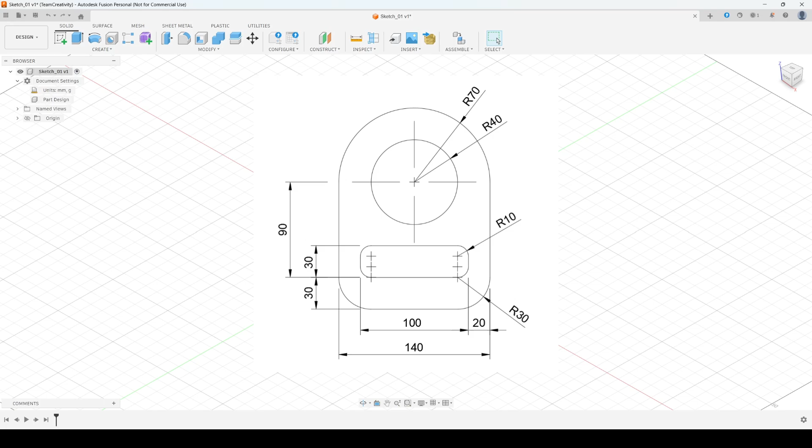Alright, let's get started. I'll press the S key and choose Sketch, then select the front view. Press S key again and choose Center Rectangle.

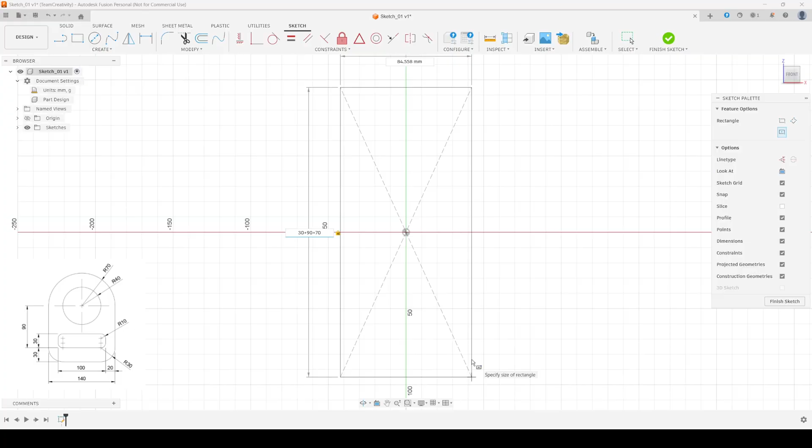Here, we don't need to calculate anything manually, we can simply type the values. I'll enter 30 plus 90 plus 70, then click Tab and type 140. After that, press Enter. Now we can see the rectangle turns black, which means it's fully constrained and can't be moved manually. That's exactly what we want.

Next, let's draw the second rectangle. We'll add the dimensions: the height is 30 and the width is 100.

Okay, now we need to constrain this rectangle. We also need to define the distance from the main rectangle, so 20 millimeters from the outer edges and 30 millimeters from the bottom edge.

Now that the inner rectangle is fully constrained, we can move on to creating the top rounded shape. One way to draw the R70 arc would be using a circle, but I'll show you a simple method using Fillet.

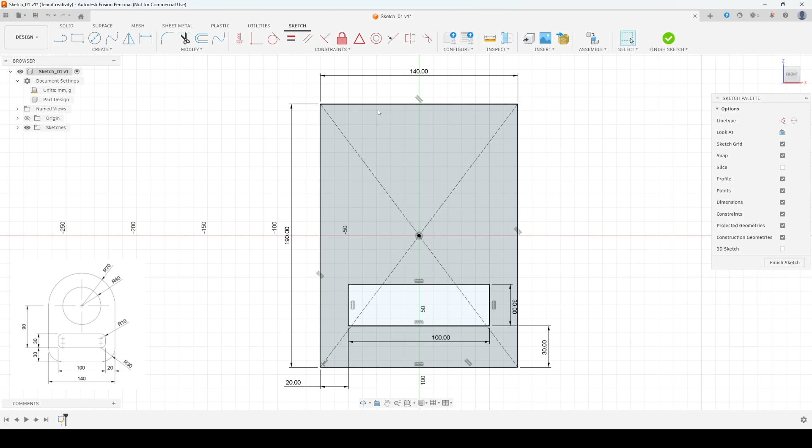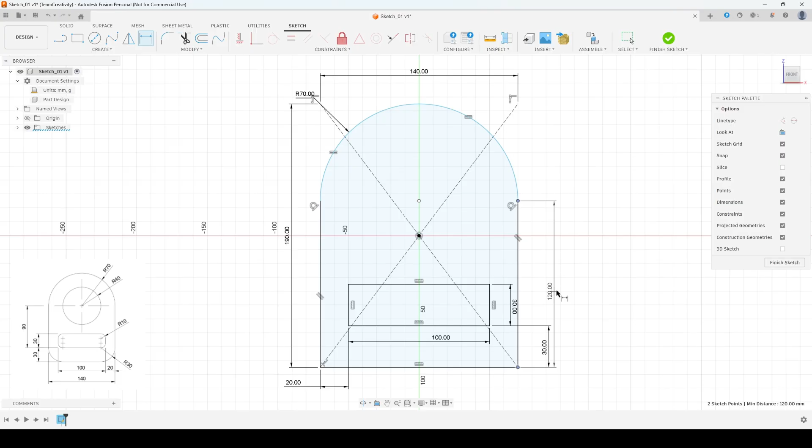Let's click Fillet and select this edge and this edge, then the opposite pair as well, and enter 70. You'll notice that this rounded area turns blue, which means we have lost one constraint. To fix that, I'll select this top point and the bottom reference point and simply confirm the distance. Now the sketch is fully constrained again.

Next we'll add the inner circle, so click S key and choose the circle function. We already have the center point, so we can simply click in the center and draw the circle. The radius is 40 millimeters, which means the diameter is 80, so I'll type 80 and press Enter.

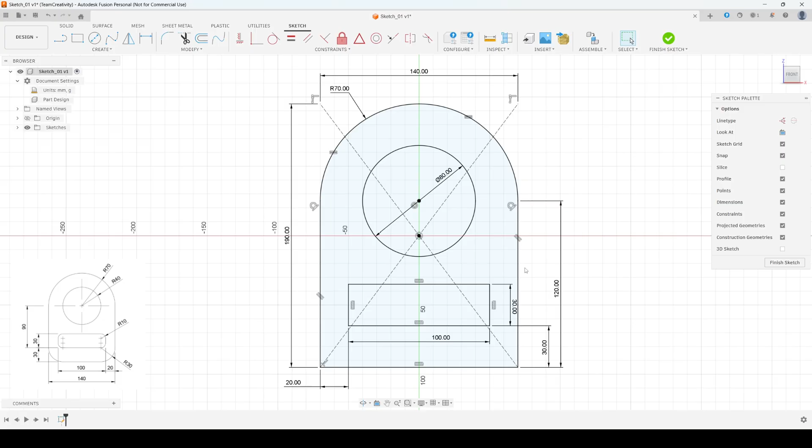Now we just need to add fillets on the smaller rectangle and on the bottom corners of the outer shape. I'll press S, type fillet, select fillet for sketches, and click the edges one by one. After you've clicked all edges, enter 10 millimeters and press Enter. Fusion automatically applies the fillet to all selected corners.

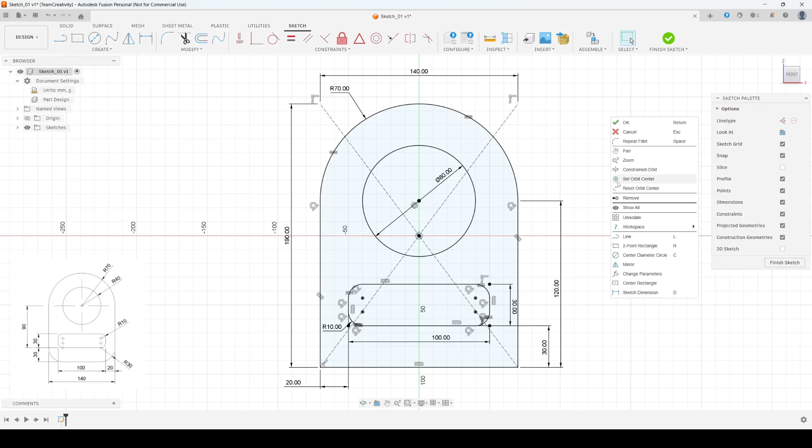Now I will right click and choose repeat fillet, this time entering 30 millimeters for the bottom corners. That's it. Let's take a quick look at the sketch.

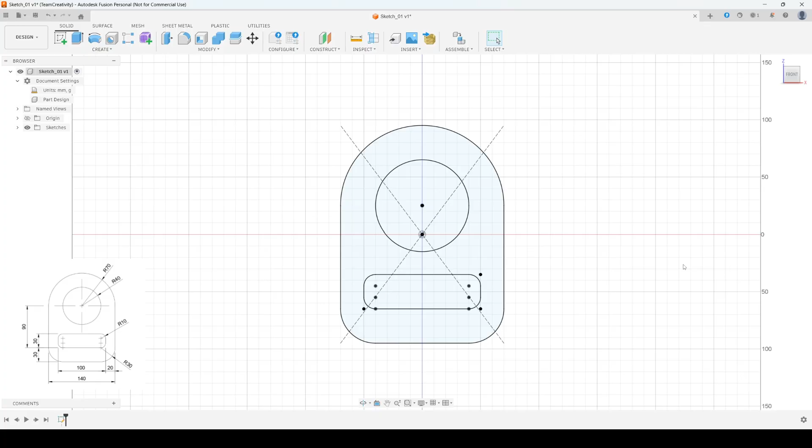Everything looks good, fully constrained and clean. I'll click Finish Sketch, and just as an example, if you want, we can extrude this sketch. I'll press E, select the profile, and set the extrusion to be symmetric on both sides. We'll enter 20 millimeters, switch to the home view, and there we go, our first 3D model.

And that's it for sketch practice 1. We started from a 2D drawing, built a clean and fully constrained sketch, then quickly turned it into a simple 3D model just as an example. The main goal here wasn't speed, but understanding the process: how to read a sketch, choose the right view, apply dimensions, and keep everything fully constrained.

In the next sketch practice, we will work on a few more sketches and gradually increase the complexity, so you can build confidence step by step.